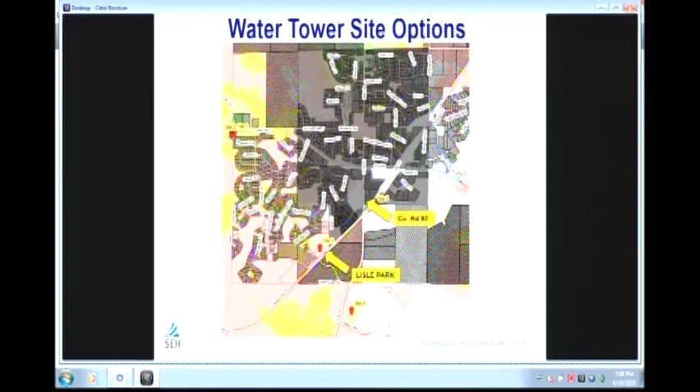If you recall, these 2 figures were included in the May 3rd memo as well. The top figure here merely shows that we're trying to maintain the same hydraulic grade line, and at Kings Point, where it's located, the ground elevation is a little bit higher, so you get a shorter column.

As opposed to the Hunter's Crest area, where we're seeing potential for some taller towers, so this tower here is more expensive than that one if they're the same size, just because of the additional column height. I just wanted to reflect that again.

So site 3, which is Lisle Park, and site 5, which is the County Road 92 site. We looked at this and considered the cost of construction of the tower just based on the existing land elevation in that area.

And then Chad went ahead and said, well, what's it going to cost to connect this water tower at that site to essentially the 12-inch trunk system that runs through Hunter's Crest? And that's where we come up with these total numbers there.

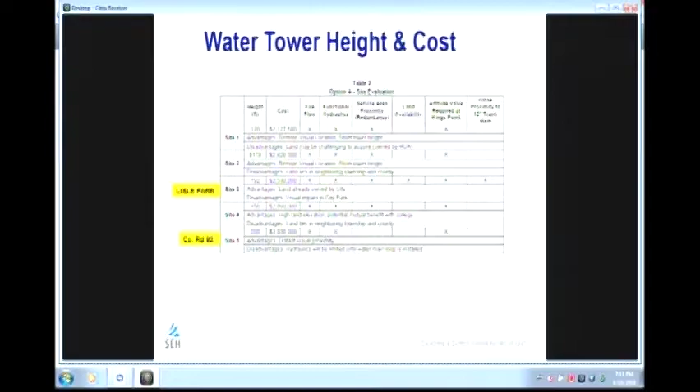Conversely, for the 92 site, you've got the fact that the property would have to be acquired, and that there's going to be a longer transmission main.

So then we also looked at ground storage. The idea with ground storage is visually it's just kind of a little bit more out of sight. How does this system work? Basically, we would have the same storage amount, but rather than having the water already pumped into the tank and ready to go, you fill it off of the hydraulic grade line into the tank, and then you boost it up as you need it later on. So that's a little bit of the difference there.

So the ground storage reservoir and booster station, I want to make sure that's clear: for the ground storage, you'll need a pump station. I have some pictures of some typical ones that would go along with that, to be able to get the water back up.

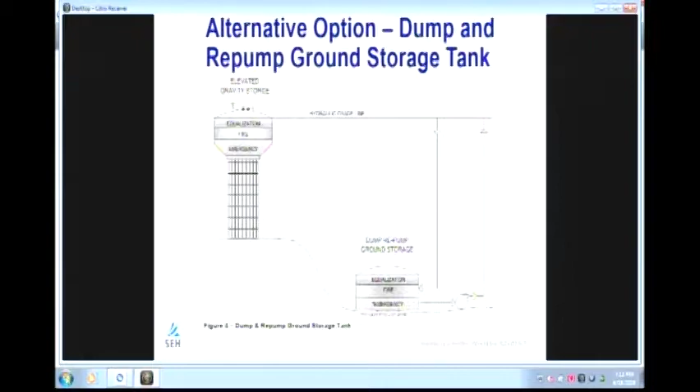Mr. Jensen asked if he could explain again about the ebb and flows of the water pressure, and that the ground storage would not address that.

Yeah, I'll have Chad - we have a slide on that. They do operate a little bit differently.

So the ground storage reservoir, I just wanted to give you an idea what goes into that, and again this was in that May 3rd memo. So cost for site work, for water main, for the pumping station I was talking about, and the ground storage reservoir itself - in this case, it's a 500,000 gallon ground storage reservoir.

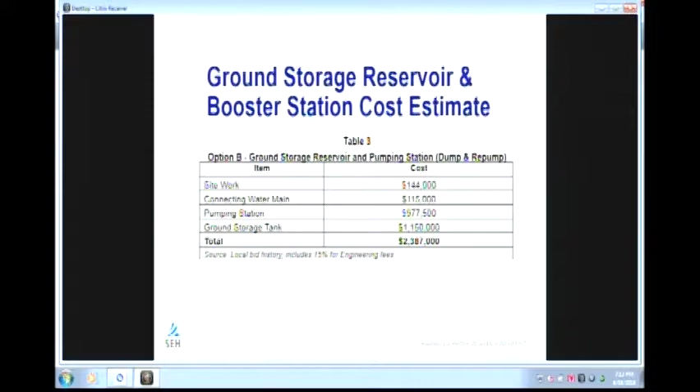So it kind of gives you an idea here that it's in the same ballpark really as an elevated tank. I think if I back up a little bit, it appears that it's a little bit less in terms of capital cost right now than going with an elevated tank. And then there's some maintenance costs that we'll get to.

It's actually about the same, based on if you take the line - if you're truly comparing the tank above ground versus underground, based on your slide two back... one more... there. If you look at the 4th column in, it's 2.415 versus 2.458. They're about the same.

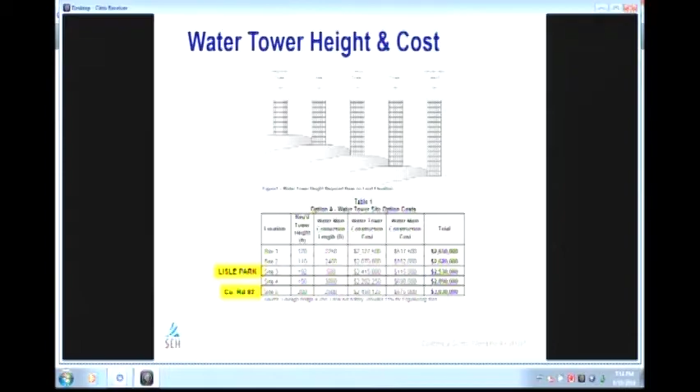The only thing here is you've got the water main that has to connect. But I'm talking about the cost of a tower versus, regardless of where it's situated, so that you could in theory put that tower in Lisle Park at that cost.

One thing I do want to point out is that this estimate here is a little bit conservative, so it allows some flexibility. If we make the tank bigger around, you can make it lower, things like that. You can maybe bury it in the ground, depending on the groundwater. The lower you go - basically the more you try to get it out of sight - the higher the cost is, whether it's earthwork or diameter of the tank or whatever.

So this one is hard to read here a little bit. Again, these were in the May 3rd memorandum, but what we wanted to show is this composite water tower - essentially, I think this is a 50-year life.

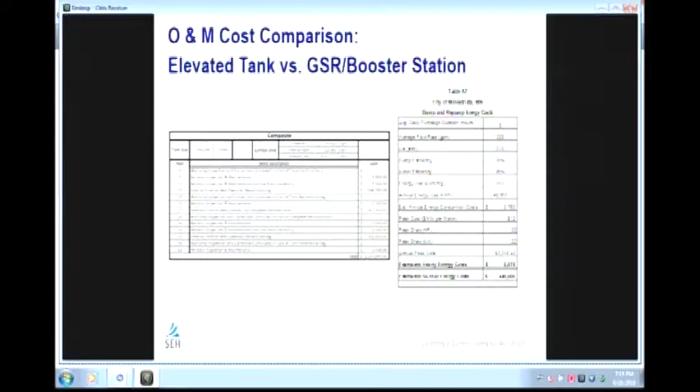So here you can see O&M costs, about $1.1 million, and here the ground storage reservoir, including pumping now - because remember, you've got to bring the water down, and then you've got to pump it back up - is just shy of $500,000. But that's again over 50 years.

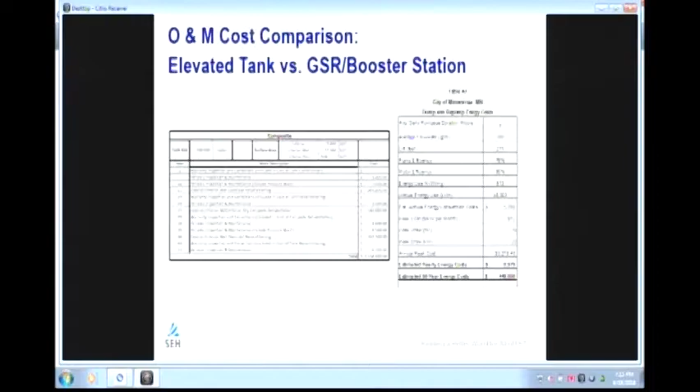Since we can't see that too well, why is the overhead one so much more expensive? This is painting - painting is expensive. And this is a concrete column, which you wouldn't paint.

So if you see, the concrete columns are more of a newer version. If you look at all the steel fluted column ones, oh my gosh, those cost $1 million every time they paint them.

David and I are nodding our heads because we both live in Eden, and it's a lot, yeah - painting $1 million, $1.8 million total cost.

So anyways, this would just paint the steel bowl itself, inside and out.

And now, I think Chad, you want to cover this part here? Sure. Here's the point.

I just wanted to share a little bit on the operational differences between an elevated tank and a ground storage tank, because there are some differences. Yes, they hold the same amount of water volume-wise, but the rate at which water goes in and out of them differs quite a bit.

The way a water tower would typically operate is pumps at the water plant turn on to fill the tank, and they turn off when the tank is full. The tank drains down as people use water, and pumps turn on and fill it again.

The rate at which it fills and empties varies depending on when people are using water. Within your community, there's a lot of water use in the early morning hours, both from irrigation in the summer and people getting ready in the morning. That's when the lion's share of your water use occurs. So at that point, water is going into the system from the water plant at the same rate as consumption, so the water tower level just hangs flat. It'll go up, it'll go down.

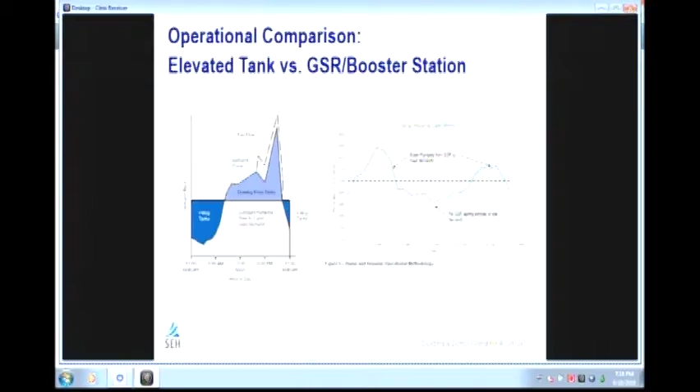For a ground storage tank, we actually have to pick the times when water is going to go in and out manually. Where the elevated tank works with gravity, the ground storage tank uses pumps. So we'd set it up to fill the tank during periods of low use, maybe in the afternoon, later in the evening, or just past midnight, filling the tank from the distribution system. Then during periods of high demand, say from 4 a.m. on, or say 8 hours, it would be pumping into the system from the tank. So you're basically letting water in, pumping water out, depending on demand in the system.

Now, I have a question for you on that. Can you do both at the same time, pumping into the storage tank and pumping out at the same time? You can, but really they would cancel each other out, because you'd likely be letting it in at the same rate as pumping it out, so it'd be kind of a zero-sum game. But yeah, it would be theoretically possible.

The difference between the two is, when you're filling an elevated tank, you're filling it up in the air, so you're pushing water in the system, and that water in the air is providing pressure in the distribution system. Now if we jump to the ground storage option, we're filling it at a much lower elevation, so we actually have to break system pressure to push water down and let water in at that elevation. So the homes around that ground storage tank, when the tank is filling, depending on the rate of fill, will experience a slightly lower water system pressure because there's water flowing that direction into the tank.

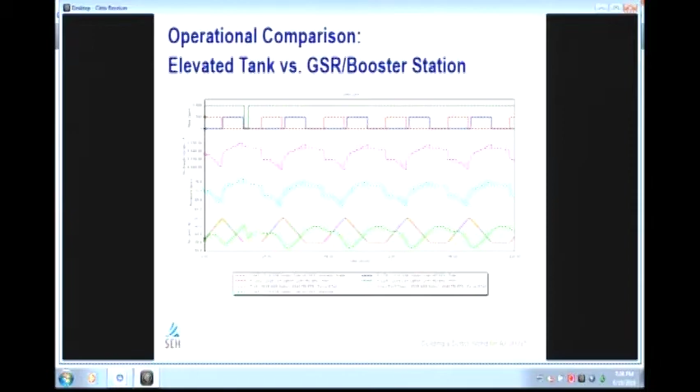And then this light blue line represents basically customer pressure in the southwestern part of the system, under stress. So you'll see the pressure drops a bit when we're filling the tank. And then when we kick the pumps on, pressure goes back up again. And then when we start the cycle over, things balance out to where they're currently at. The next day begins, pressure goes down, pressure goes up. So it kind of follows that streamline, and we're really operating that based on the limits of how much water we can let in and how much we can push out without excessive pressure loss or gain, that sort of thing.

Really, the model allows us to understand how things might operate and feasibly work by adding this new component to the water system. This is just a blow up of a single day of the very thing we were just talking about.

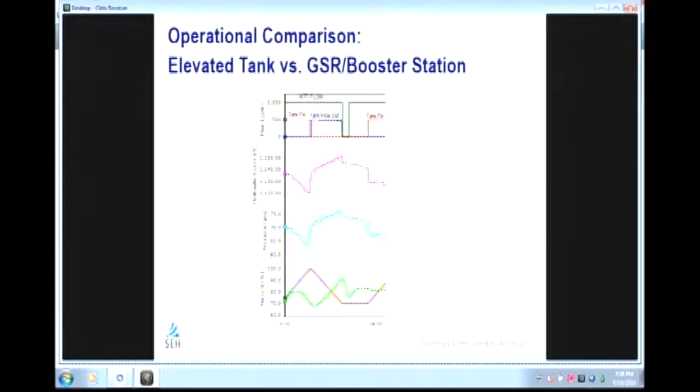So with that, Miles is going to get into some of the more specifics. This is the fun part.

Mr. Jensen, could I ask a question? So with either the water tower or the ground storage, you were talking about pressure. What do you need, and I don't know if you would know this, what do you need for sustained fire fighting?

Yeah, so the way water systems are rated really depends on the land use. A typical residential development will need about 1,000 to 1,500 gallons a minute of flow pulling out of the pipe, while maintaining a certain residual pressure. The bottom end limit you want to see in your water system is basically 20 psi, which is well below normal service pressure. So what we're shooting for is a threshold of 1,500 to 2,500 gallons a minute of fire flow, depending on the part of the system we're in.

So 15 to 25, and how long? Is it like 10 minutes or 20 minutes? What's that? Again, that comes down to the type of house, land use, that sort of thing, but it's usually in the range of 1 to 3 hours.

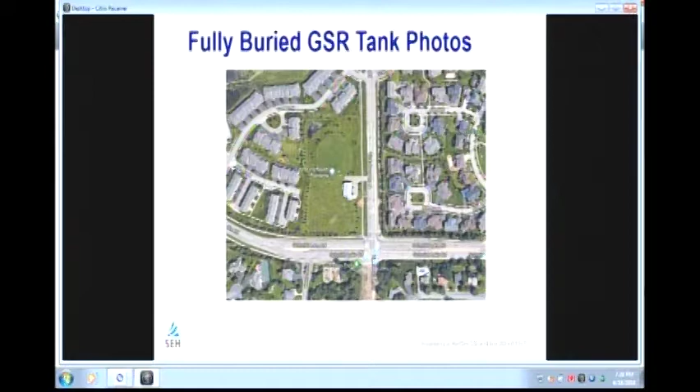This one is in Plymouth. This is a 7 million gallon tank that's buried, and then there's the pump station. The next photo shows the booster station with a gen set that goes with it, so there's a generator in there, some chemical feed, and some high service pumps. This one's 7 million gallons.

How much soil do they have on the top of those tanks? How thick is the soil on the top of those tanks? Probably 3 to 4 feet.

I think the structural people would like to bury them because then you take thermal energy, and they weather better than the ones that are just above grade. This one was at Stillwater - there's the booster station, and then there's the tennis courts.

Do they ever have to do maintenance on any of those that are buried? Not very much. This one here, there's some hatches right here, and so that concrete's exposed. It may take some freeze-thaw and might crumble, but we're talking years and years, otherwise no. As a matter of fact, even these, there's not a lot of maintenance to do on those either.

I wanted to show you the architecture on this one too, that's why I picked it. You can put some little arches on it and pilaster kind of things to break it up so it doesn't look just like that. You clean the inside just like you would an elevated one every once in a while, but you don't have to paint it. That's the difference.

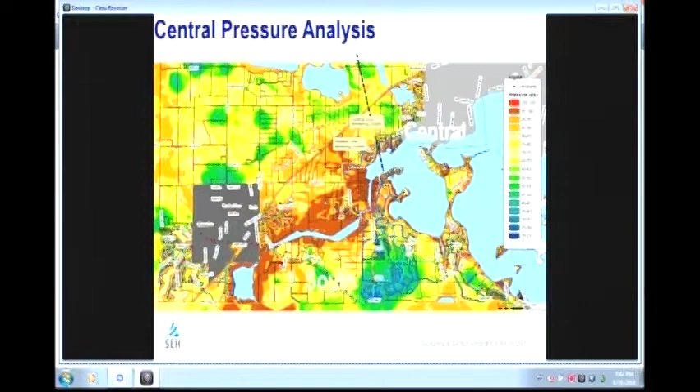So there's very little pressure variation in that system due to the water tower. The central system operates on a hydropneumatic tank, which is a small 3,000 gallon tank made up of air and water, much like you'd see in a rural residential home operating on a well, where the well pump kicks on, pressure goes up till it reaches the stop limit, shuts off, water comes out of the tank to feed system demand, at which point it reaches a low limit and the pumps kick on again, and that cycle continues throughout the day. This is a single day's worth of time.

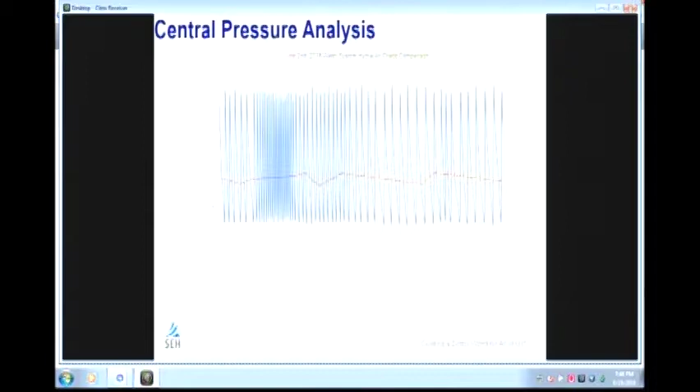So I guess with that, that's the extent of what I have to say.

Okay, I think that kind of finishes up my May 7th discussion a little bit. And I think that if there were a next step relative to Lisle Park ground storage reservoir, I think a soil boring would be in order to reduce some of the speculation on where we can put this, what elevation. I think that would be the most logical next step. I think that's all we have.

If there's any questions, any other questions? I do. And I really appreciate the analysis of the pressure analysis and the understanding of the difference between the towers and the ground, and that's been really helpful.

From what I understand, there's two reasons for needing additional storage. One, we talked about a year ago, and that was fire flow. Part of this analysis was testing those flow hydrants in Hunter's Crest. We were under the impression a year ago that those flow hydrants, the water flow was about 500 gallons per minute. And with this analysis, it's come back and shown that it's almost double that, 1,000 to 1,200 is what the report said. So the urgency that we were feeling a year ago for this water tower I was hearing was based primarily on fire suppression in Hunter's Crest.

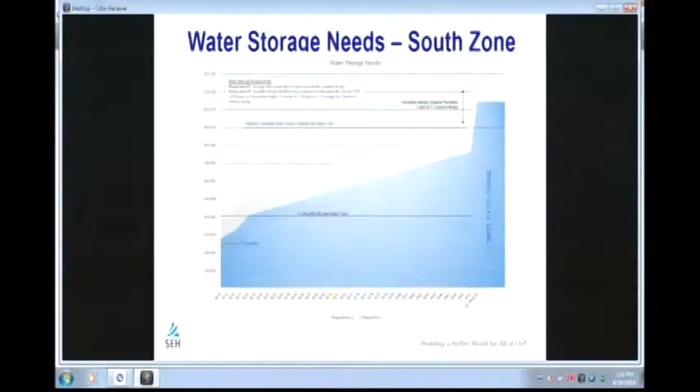So what is the projected population in 2019? Can you see it on the chart there? We had that on the chart itself. It was based on building permits. Oh okay, I went out and studied, so okay.

I'm just wondering how close we are to the projections. The graph's showing the gallons on the year, so it's based on actual usage now, and then projecting based on how much more we'll need based on growth.

One thing that's kind of interesting in the analysis that Miles and Chad have done is that what they're seeing in their analysis, Public Works is seeing in the field. For instance, initially there were going to be 3 water plants and an elevated tank as part of that, and it was decided to put in 2 just to meet the capacity the city needed. Well, what's happening now is we're in a position where well 3 — and I don't think well 4 is kicking on — but they're getting a lot of use out of well 3, and there are some days when they're having trouble keeping up. So well 3 is a backup well, so is well number 5. They would back up, but those distribute water directly to the system, so it's not treated. You're getting blended water, but you're getting more water. The people who are in the areas of those wells are getting less treated water than they would.

So that's the other issue, if you will. So, your question — which year was it? I'm just saying that we're going to be out of capacity — not out of capacity, but it's going to start reaching into that fire capacity in 2019. So that's what I was wondering — what are those projections? I'll encourage you to look in the appendix of that May 3rd memo.